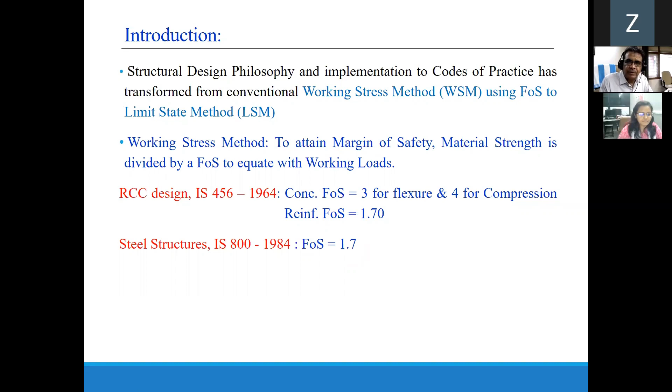The limit state method of design for RCC structure was implemented in 1978, and this method was adopted using a partial safety factor approach. So in place of having only one factor of safety, where material strength is divided by a factor of safety, two partial safety factors are used.

These partial safety factors are for the loads as well as for the materials. As seen in the table, the partial safety factor for the load is a multiplier - that means the working loads or characteristic loads are multiplied by these factors, 1.5 and 1.5, for the dead load and imposed load combination. And if the earthquake load combination along with dead and imposed load is there, the partial safety factor is 1.2, 1.2, 1.2. Two different limit states are also defined: one is the limit state of collapse and another is the limit state of serviceability.

So these are the partial safety factors for the loads, and there are also partial safety factors for the materials. The partial safety factor for loads is a multiplier, whereas the partial safety factor for materials is a strength reduction factor. For concrete, the partial safety factor is 1.5, and for steel reinforcement, it is 1.15. Here, for concrete, a conversion factor from cylindrical strength to cube strength of 1.5 is also used, so it becomes 2.25 for concrete.

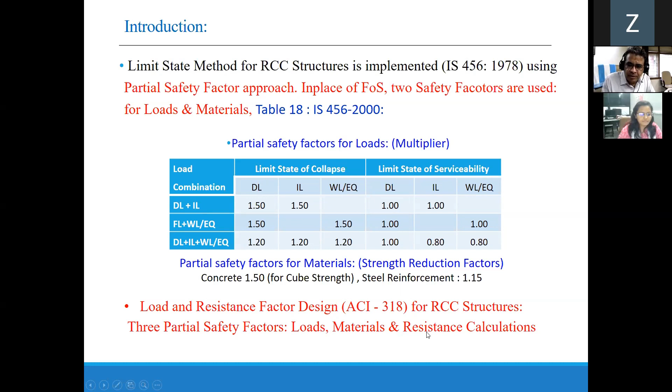So here we are using two partial safety factors in our IS 456, whereas for the design of RCC structures, ACI 318 is using load and resistance factor design - that means there are three partial safety factors. One partial safety factor is for loads, another is for materials, and the third partial safety factor is for resistance calculations or preference of the resistance.

Let us discuss the various requirements for a design - what are the design criteria for designing a safe building, a safe structure? So the first criteria is the stability criteria: the structure should remain stable. Stability is referred to with the global supporting system - it should not overturn, it should not slide physically.

If there is a simply supported overhanging beam, and the load on the overhang is very large, it will overturn. So there is a convention: whenever there is a simply supported beam with an overhang, the support portion should be 1.5 times the overhang portion, to ensure a safety factor of 1.5. So one of the design criteria is the stability check - irrespective of the material, irrespective of method of design, it has to have a factor of safety of minimum 1.5 for overturning and sliding. This is mentioned in IS 456.

Another criteria is safety. Safety is assured with reference to the collapse state. Collapse occurs due to failure of a material. When maximum stress in a material is more than the strength of the material, the state of collapse occurs.

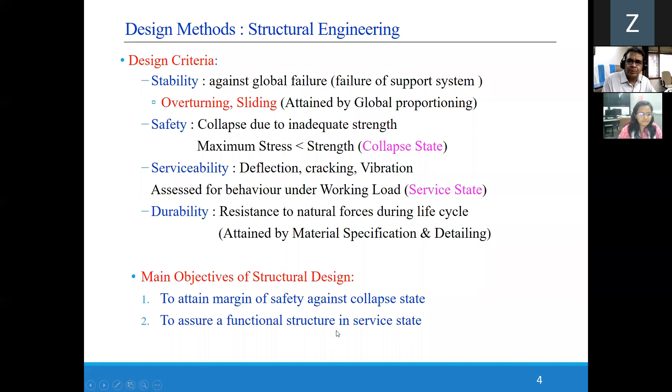So if we see the main objective of the design, as a structural engineer, primarily we take care of two states. Stability is taken care of overall - global care is taken. So mainly detailed design is carried out for two criteria: one is the limit state of collapse, in which we have to attain a margin of safety against the collapse state, and another is the limit state of serviceability, in which we want to assure a functional structure in the service state.

Now we will discuss various design methods in detail. One by one, we'll see what are the design methods, what are the limitations, what are the advantages, and how it works.

So basically, if we look at structural engineering, it is composed of structural analysis as well as structural design. The types of problems handled in structural engineering are the frame structure - that means linear structures. A frame is composed of beams and columns, a composition of a number of beams and columns, and you are designing it in a single plane, or it may be a three-dimensional frame. But these elements are linear elements. So in a frame structure, it will be a two-dimensional, three-dimensional, or one-dimensional structure, but all the elements are linear elements.

Whereas another type of structure is considered to be the planar structure. In the planar structure, the components are slabs, shear walls, folded plates, shells, where you have to carry out the analysis in two dimensions. Here these slabs are considered to be plate elements subjected to transverse load, whereas the shear walls are considered to be plates subjected to in-plane forces. Then there are folded plates, shells, etc. All these are planar structures, structures in two dimensions, for which two-dimensional analysis will be required.

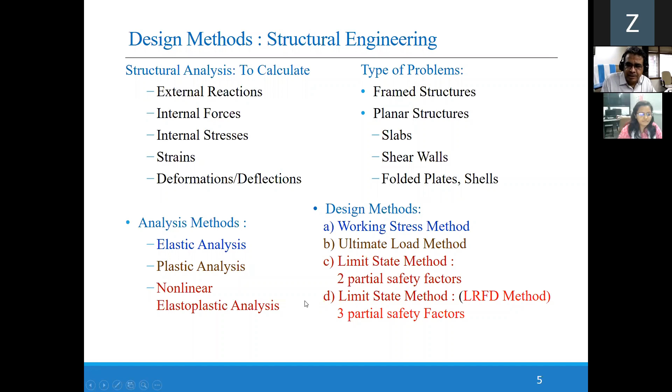So for the limit state method, the actual method of analysis has to be a non-linear method, which is elastoplastic analysis. And let us see what difference it makes.

I'm taking a very simple problem: a two-span continuous beam. When we carry out the moment distribution analysis, the bending moment calculation after moment distribution gives support moment at B equal to minus 144. The span moment for the end span is 115, and the span moment for the middle span is 36 kilonewton meters. The problem is simple and can be done easily with moment distribution.

But if I go to plastic analysis, what is the requirement? It has to form one hinge at the midspan of AB and one hinge at support B. After formation of these two hinges, the bending moment will be the same at the midspan as well as at the support. So at the midspan, the bending moment increases from 115 to 123, and at the support, the moment reduces from 144 to 123.

So if you are doing the working stress method of design, elastic analysis values are required. Now in the plastic state of design, for the end span, the bending moment is 123 minus 123. And if you are doing plastic analysis for the second span, the bending moment here is 90.

So you can visualize that, all of us are using limit state method of design, and we are doing the analysis with the elastic method of analysis. Whether you are using any software, ETABS or STAAD or anything, it gives you the design in the elastic state only. For the elastic state, the bending moment equals 36. For plastic state, the bending moment equals 90. For an intermediate state, it can be somewhere between 36 and 90. So whenever I'm designing for this particular midspan moment, I should provide a capacity more than 36 and less than 90. There is a variation in the positive bending moment in the midspan due to choice of the analysis method. When you are doing ultimate load method of design, both these two can be 90-90.

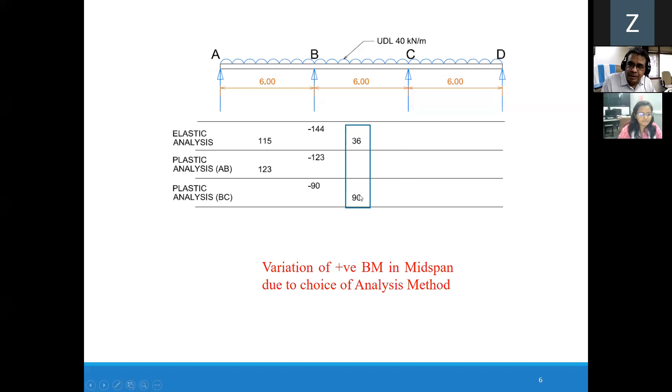So before we go into the design methods, we understand the design steps. For the structural system, we first define the structural system with base fixed or hinge. We select the material, meaning we select the strength and deformation parameters - what is the grade of concrete, what is the Young's modulus. All those parameters are selected. Then we proportion the members.

After proportioning the member, we find out the loads. All types of dead load, imposed load, and earthquake loads are calculated. After that, the analysis is carried out. For all the members, we calculate axial force, shear force, bending moment, and torsion. So once the analysis is done, we carry out the design.

If it is an RCC member, the beam members are primarily subjected to bending moment. So Mu upon BD squared - you have to check for the shear force and provide shear reinforcement. If there is torsion, you have to consider equivalent bending moment and shear force. If there is a column member, you have to design it for axial load and uniaxial or biaxial bending as applicable. Once you have done the analysis, you do the design.

If the members may not satisfy, in that case you have to do the iteration. After iteration, you complete the design and carry out the design detailing process. This is the design process, design steps which are involved in the design of a structure.

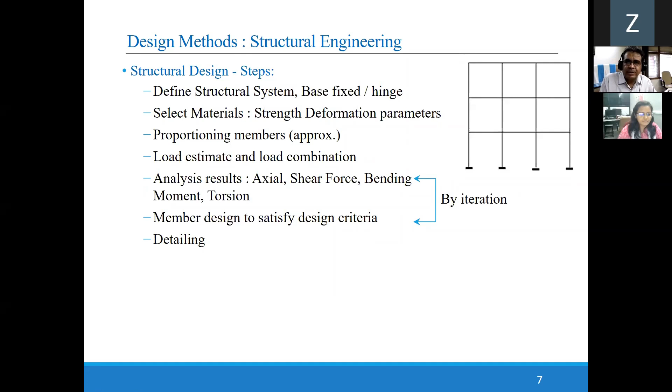So now I'll try to explain what different methods of design are. I'm taking a very simple problem - the sitting of the students is done on benches. This is a bench on which the students are expected to sit. This is a four-seater bench where the width of the bench is equal to 50 centimeters.

These benches are normally manufactured using wood. So I'm taking the stress level as stress of wood equal to 150 kg per centimeter square. This is an illustrative problem to convey the concept of design.

So we are having 4 persons, each of 75 kilograms, sitting on the bench. Approximately, if I consider the total weight, it becomes 300 kilograms. Now, this 300 kilogram, instead of considering it as a point load, I am idealizing it as a UDL. So total 300 kg load, if idealized as a UDL, becomes 150 kg per meter.

And then the bending moment that is induced is equal to WL squared by 8. So 150 into 2 squared by 8, the bending moment induced is 75 kg meter, and maximum shear force at the support is 150 kg.

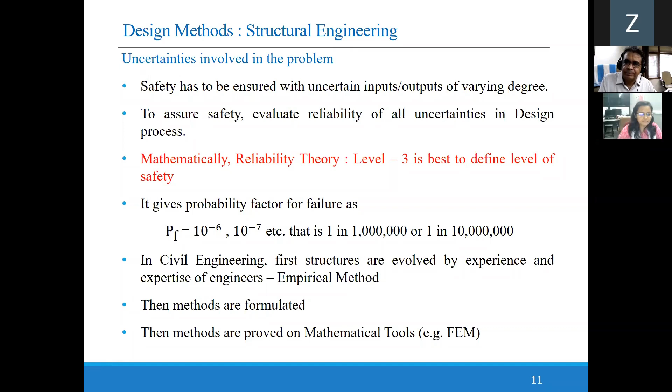The same is applicable to the LRFD method. We say that the LRFD method should have level 3, but that's not possible, so we'll have to satisfy ourselves with something less than that.

Now see the design methods. We have seen that there are three uncertainties. One uncertainty is with reference to the loading, with reference to the material, and with reference to the resistance calculation.

To cater to this need, the earliest method of design was the working stress method. What we do is apply a factor of safety. This factor of safety generally used for concrete, wood, and such materials is 3. For steel, the factor of safety used is 1.7.

In our problem, with the maximum bending moment of 75 kg, I was considering the stress level to be 150 kg per centimeter squared. So if I provide 2.45 centimeter thickness of this section, with this load it cannot handle any uncertainties. Anything slightly more than 75 kg, or material slightly weaker than this 150 kg per centimeter squared, will fail.

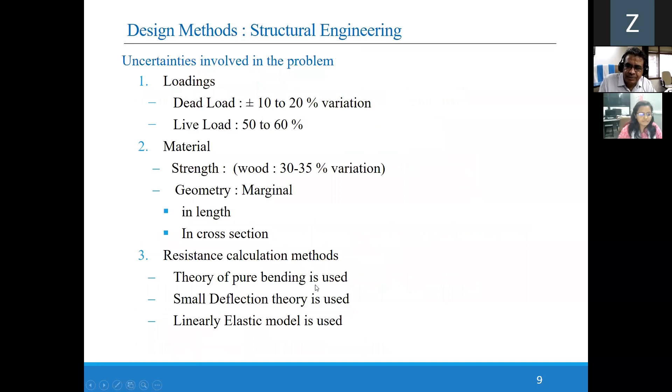So to allow for uncertainties, I am putting a margin of safety with reference to material strength. Material strength is 150, so instead of 150 in this equation, Z equals 75 into 100 by 150, I should put a margin of safety of 3. That means my sigma allowable will be used instead of sigma yield point.

Yield point is 150, factor of safety is 3, so allowable is 50. My Z required is 150 centimeters cubed, and BD squared upon 6 is equal to 150. Therefore D is equal to 4.24 centimeters. So by the working stress method of design, I provide the thickness of the wood in the benches to be 4.24, say 4.2, 4.3, or you may go for 4.5 centimeters.

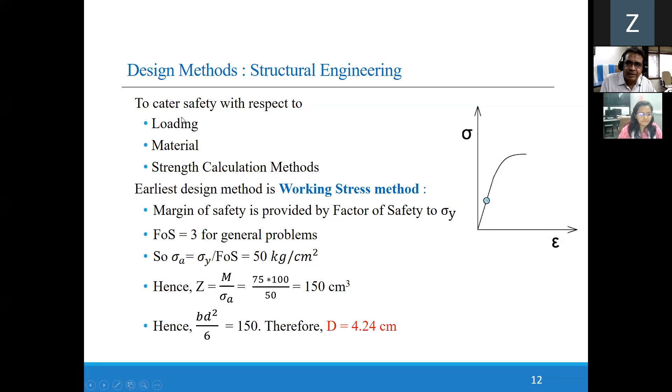So approximately 1.75 inches thickness is provided for the benches, and it will be safe. It will resist all the uncertainties in loading, uncertainty of material, and uncertainty of strength calculation. So this is the working stress method.

Ultimate load method: what we do is, right now I'm having the weight of the person as 75 kg. What is normally done is I increase the weight of the person by some factor. Whatever loads are there, I'm not decreasing the stress level, I am increasing the load level. So all loads are increased by 1.7 times.

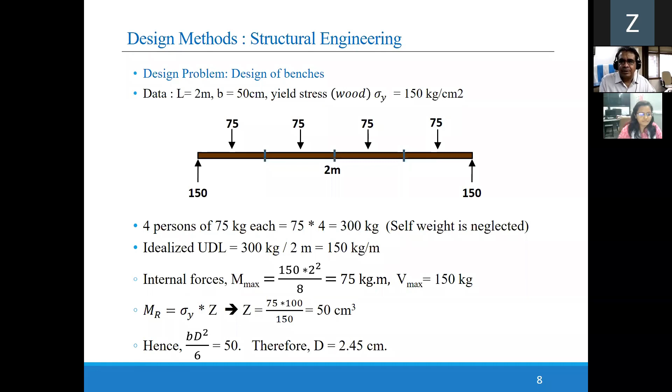That means approximately 120 kg. If all the people are 120 kg, that will be the collapse state, so 120 kg people will not be possible. That 120 kg has to take care of the material, the loading, and the approximation in the resistance calculation. So this next method of design was the load factor method.

Now this is a load factor method of design. So what is done? The loads are increased by a factor, that load factor is 1.7 to 2. So if this is wood, we are increasing the load factor equal to 2. So Mu is equal to, instead of 75, it becomes 150. So Z becomes 150 into 100, Mu upon sigma y. So that becomes 100 centimeter cube. So our thickness is how much? D is equal to 3.46 centimeter.

So if we are doing it by the ultimate load method, I am getting a thickness equal to 3.5 centimeter. Working load, it was 4.24 centimeter. Here I am having a concept in my mind that when the load becomes 2 times, that means when the weight of the person is 150 kilogram per person. So that means I have an idea what can be the overload it can take. So now the safety margin is known to me in terms of extra loading.

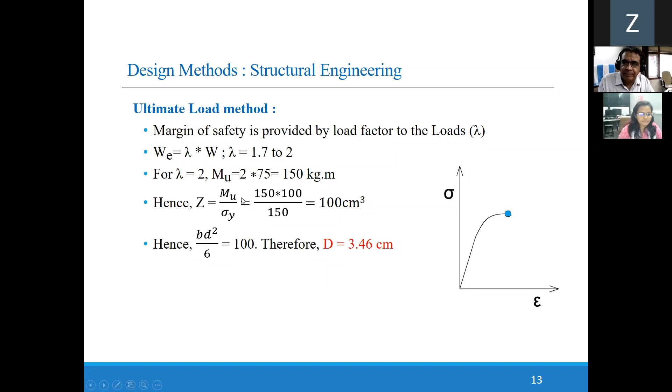So if we now compare these two methods, here margin of safety is with reference to the material only. In the ultimate load method, it is with reference to the loads only. Here, when you are using working stress method, there are loads with different uncertainties. I say no, dead load uncertainties are very less. What is the variation in the cross section of the beam, cross section of the benches? Hardly some small variation can be there, 5-10% variation. And variation in the live load is more. So I should not keep the same margin of safety for dead load and same margin for live load. But because there is only one factor of safety, we are having same margin for dead load and live load both.

So in ultimate load method, you are having same margin but different load factor. So for dead load, you can have a load factor 1.3. And for an imposed load or live load, you can have a larger factor of safety because this is more uncertain. In working stress method, we have margin of safety with reference to the material strength, and it is not cognizable. That means when it is overloaded, you will not be knowing how much overload it can sustain. Whereas in the case of ultimate load method, it gives us a physical sense. You said that if you are having a load factor of 1.5, that means at least up to 1.5 part, it is going to sustain the load. So when it becomes 1.1, 1.2, 1.3, we are assured that however it is overloaded, it will not collapse.

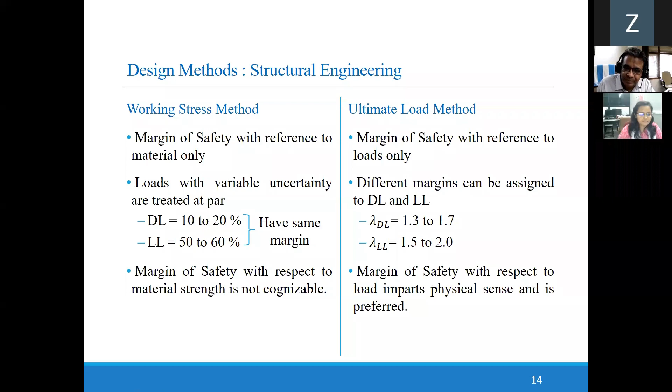Another important point in both the design methods is, as I said, in working stress method, we are having a factor of safety against the maximum stress value. So when your maximum stress value is divided by 3, at which level we remain? We remain in a very lower stress value. And lower stress value means it is almost a linear part. So in the analysis, we can neglect the non-linearity, both in the analysis as well as in the design strength calculations.

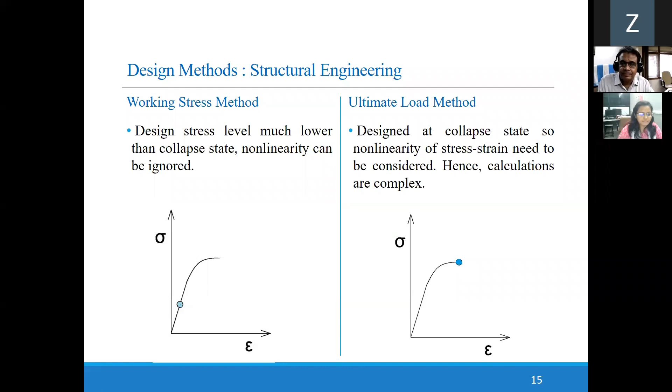In the ultimate load method, at which state we are designing? Ultimate load method means you are increasing the load to collapse state. So what is the design state? The state of design for the ultimate load method is the peak value. And for that value, you have to take into account the non-linear behavior and the method of analysis. That elastic analysis will not work here. You have to go for a plastic analysis. So for a non-linear method, for ultimate load method, we have to go for plastic analysis. Design stress level is much lower than the collapse state. Non-linearity is ignored here. For ultimate load method, non-linearity is to be taken into account, and calculation becomes very complex.

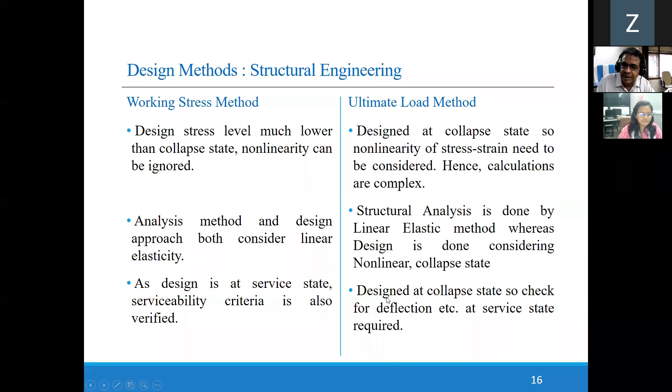Here, when we are doing working stress method, our analysis method and the design method both are linear. Whereas in ultimate load method, normally the analysis is carried out by linear elastic method and design is taken as a collapse state as non-linear. So there is an anomaly in the ultimate load method. In the working stress method, the design is completely done at the service state because the factor of safety is 3 to the maximum strength value, so serviceability criteria is also verified. Here, it is at the collapse state. So if you are doing the ultimate load method of design, you have to design it for the limit state of serviceability as well, I mean the service state also. So collapse state it is designed, but check for the serviceability, we have to make it.

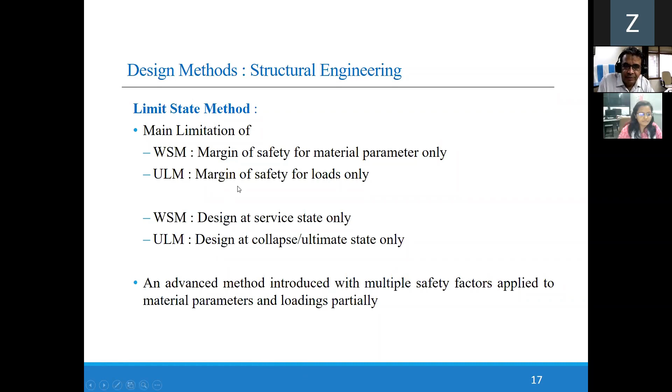So now to overcome the limitation of both these methods, the limit state method is evolved. Limit state method is evolved to take care for the margin of safety for materials and loads together. So working stress method only has margin of safety for materials, ultimate load method has margin of safety for loads. Working stress method is at the service state only, and ultimate load method is for the collapse state only. So instead of having these, multiple partial safety factors are recommended to be used.

So the limit state method means the structure will be designed for 2 states. One is the limit state of collapse and another is the limit state of serviceability. Limit state of collapse means you have an overloading factor to be multiplied, assuming that the structure will reach the collapse state. So that is a non-linear behavior to be accounted for in the limit state of collapse.

For the limit state of serviceability, we have to take care for the linear behavior only. So we have to take care for margin of safety with reference to two things: one margin of safety with reference to the understrength, and one margin of safety with reference to the overload. This has to be taken care of in the ultimate limit state method. So this is the ultimate limit state.

And to assess the deflection and cracking, what we call is SLS, that is serviceability limit state. So ultimate limit state and serviceability limit state are the two limit states that will be verified for the limit state method design. And right now we are going into much more detail about the limit state of collapse.

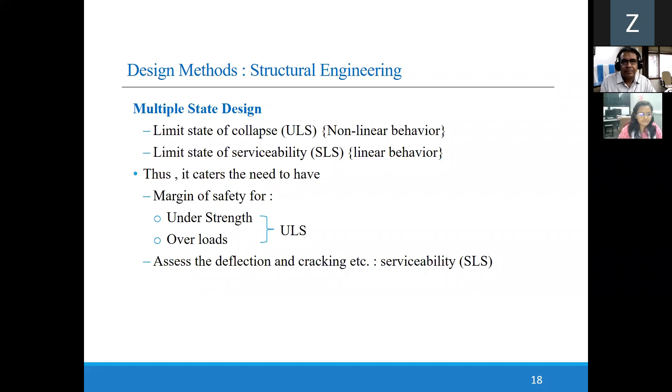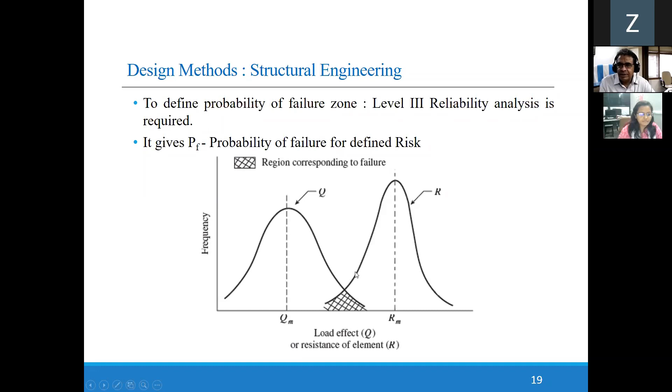This is required for those who are finding out how much the value of partial safety factors should be. So level 3 reliability, level 2 reliability, who studies this? It is not to be studied by the engineer who is implementing LRFD. It has to be studied by the engineers who are developing LRFD. There are people at Purdue University, like Salgado. There are a number of people involved in the development of EC7, Eurocode 7. They are all involved primarily in the reliability methods. So those who are involved in LRFD development have to go into the details of reliability.

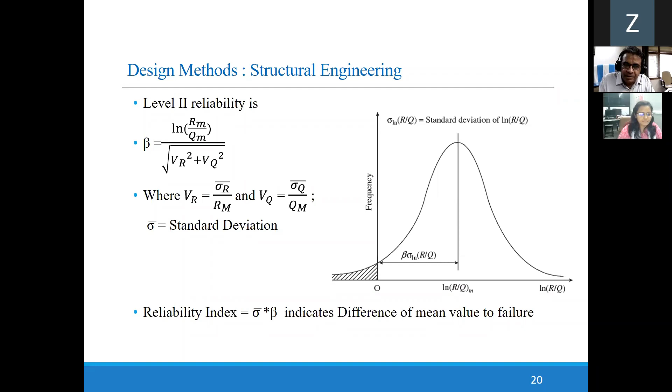So you see that the beta factor, which is calculated, gives the probability of failure. So if it is calculated, 1 in 1 million and 1 in 10 million - what is the beta value? Beta value, probability of failure comes to 5%.

Just one minute, I have to excuse myself.

Okay, so that was a phone call from my sir.

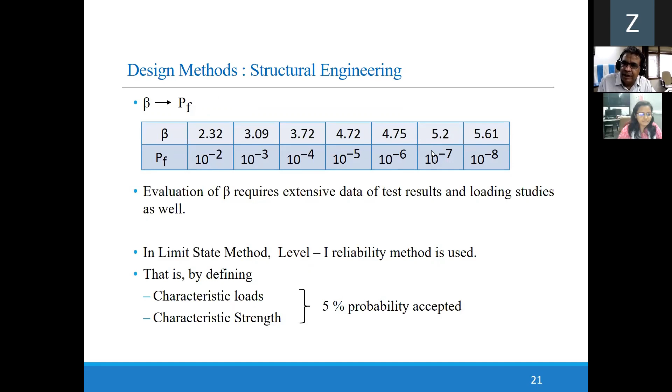So initially by level 3 and level 2, corresponding to 10 raised to 1 in a million or 1 in 10 million, what is the probability of failure? 5%. So that is derived, and after that, 5% is considered as the basic value.

So now we see our limit state method of design - it is highly simplified now. What you have to do is apply two partial safety factors. So with characteristic strength, the definition of characteristic strength is taken as the 5% value. Probability of failure as 5%.

So with 5% probability of failure, the partial safety factors for the loads are designed: dead load plus imposed load 1.5; dead load, imposed load, and wind load 1.2, 1.2; dead load and wind load 1.5, 1.5 for the ultimate limit state. So the partial safety factor for the loads, gamma, is again a multiplier. Now this partial safety factor for the load - we discussed earlier that in the working stress method, both the loads are considered at par, dead load and imposed load.

However, our IS code is also considering dead load as having the same variation of 1.5, and imposed load also having the same uncertainty level of 1.5. Using the same partial safety factor for both loads means we are accepting that the uncertainty level of both types of loading is identical.

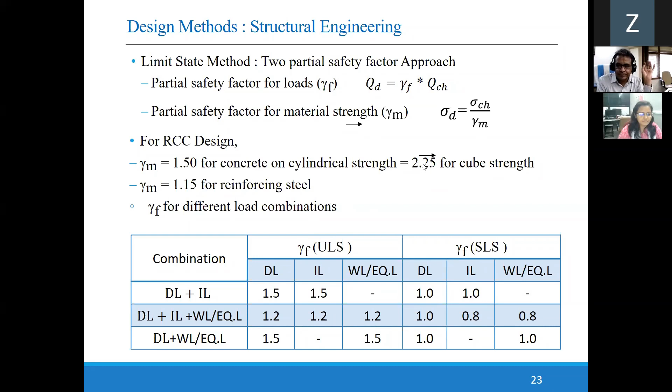So nominal resistance is proportional to the strength. Now, if you see the mu upon BD squared equation, that is directly proportional to FCK and Fy. So whatever resistance is calculated, if divided by the partial safety factor of material, it has to be equated to the loading, that is characteristic load multiplied by the partial safety factor for load. So what we have to equate is resistance upon material partial safety factor equal to loading multiplied by the overloading factor, gamma F.

So nominal resistance upon the characteristic load is equal to gamma M into gamma F. This is approximately what was resistance in the working stress method, and this is what was loading in the working stress method. So resistance upon loading is equal to factor of safety. Gamma M into gamma F gives an idea about the factor of safety.

If we consider a crude comparison, the partial safety factor will be different for different materials and loading. But if we consider the partial factor of safety for concrete: nominal resistance upon design service load, Rn upon QCH, equals gamma M into gamma F. Gamma M is equal to 2.25 for material with reference to cube strength.

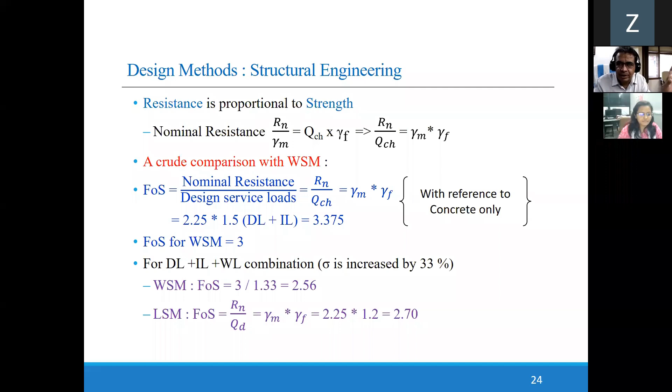When we go to the limit state method of design, what advantage do we have? The additional advantage is by going up to the partial safety factor of 1.5 for the load, we are using the non-linearity of the stress-strain curve. With this non-linearity, we get higher concrete strength, and with higher concrete strength, we get a higher value of resistance.

Now, ACI 318 format is a 3 partial safety factor format. There is a partial safety factor for the loads, a partial safety factor for the materials, and a partial safety factor for the strength.

For the strength, it takes care of 2 criteria. One is simplification of the resistance calculation, and second is preferential failure. So flexural failure is preferred, having a partial safety factor of 0.9 for resistance, while axial compression has a smaller partial safety factor of 0.7. So for columns, they use an additional margin of safety of 0.7.

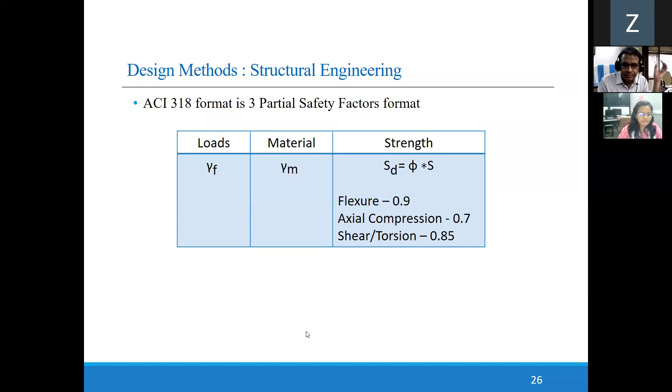This much time it took me to explain the basis of the design, because without that we cannot understand what is to be done in geotechnical engineering. What are the problems? Now the problems in structural engineering are not as much as compared to geotechnical engineering.

Even then you have to simplify, you have to come to level 1 reliability. Structural engineering is not doing the reliability method level 3 or level 2. It has to satisfy with reliability level 1.

So now whatever partial safety factor we have for the structures, we want to find out similar partial safety factors and which load combination should be used — which combination of partial safety factors to be used in different cases. This we will see in light of the Eurocode 7 mainly.

Because IRC is not yet implemented. IRC 78 we have started, but it is not implemented. So IS 6403 is used, the way we had IS 456 1964 for RCC design in working stress method.

Still we have the prevailing IS 6403 for bearing capacity calculation. It gives us the bearing capacity factors. And for getting an allowable bearing pressure, a factor of safety of 2.5 is recommended.

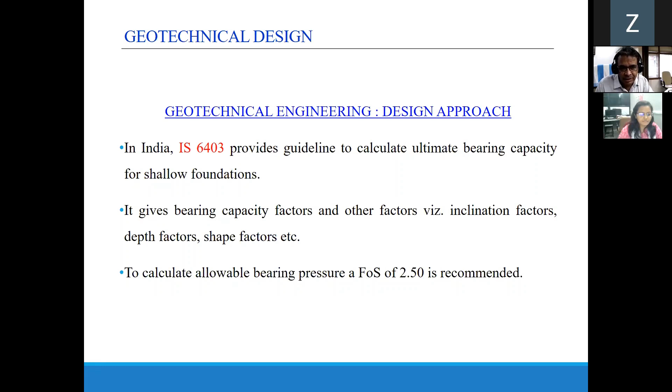So from 1978 onwards, all RCC structures are transformed to the limit state method of design. From 2010 in India, all steel structures are also transformed to limit state method of design, but still the geotechnical design, because ultimately the loads transferred to the foundation are the same as obtained in the structural design, so the method of design should be compatible with structures as well as geotechnical.

Therefore, people have made efforts in Europe for LRFD method of design to be implemented for geotechnical as well as for structures together, and Euro Code 7 is the exercise carried out for this. An exercise in great detail has been carried out, and it is implemented after 1995. It is in practice, but you will see that there are so many anomalies still there in the LRFD method.

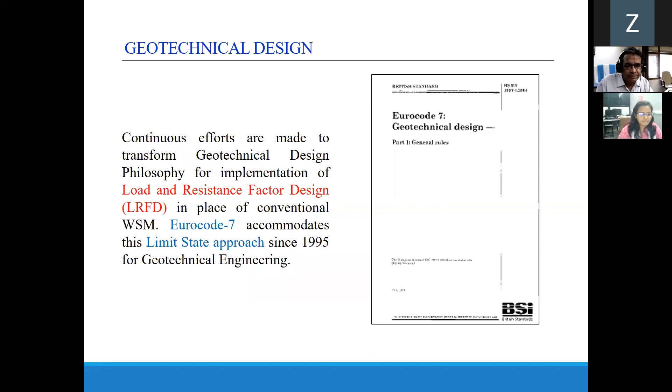IRC is also in the process of evolving a guideline based on EC7, applicable for bridges, not for buildings still. So for buildings, our IS code is not doing anything for this. For bridges, it takes care of the shallow foundation. If somebody wants to use the LRFD method for the shallow foundation, whether it's for bridges or buildings, it doesn't make any difference. Only thing is appropriate load combination should be used.

So IRC 78/2020, the first draft code, was given in 2017. After 3 years, it is again updated as a draft code and put into practice. Let us see when it comes into effect.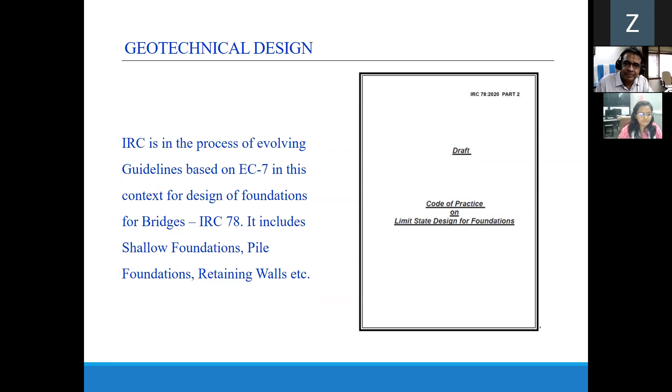Now, for design of RCC beam, as I said, the partial safety factor for the material will be applied here in FY and in FCK. So with the application of partial safety factor, the resistance calculation is directly a function of material properties. We have to see the difference between a structural engineering problem, RCC design or steel design, and geotechnical design. In RCC design, whatever material properties we consider, FCK and FY, they are directly used in the resistance calculation. So moment of resistance is calculated based on these properties directly, FY and FCK.

Whereas in the design of shallow foundation, how is ultimate bearing capacity calculated? It is calculated using the equation adopted by IS 6403 -- basic Terzaghi's equation, then Vesic's equation, bearing capacity corrections and everything. The IS code has incorporated this equation. Now what are the material properties for soil?

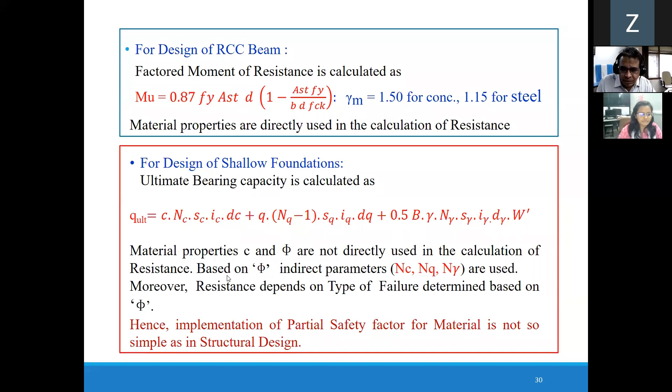So the most important aspect of geotechnical engineering application is that soil properties are not directly used for the resistance calculation, but these indirect parameters are used instead. And that is the major limitation of implementing LRFD into geotechnical engineering. So let us see the quantitative approach also.

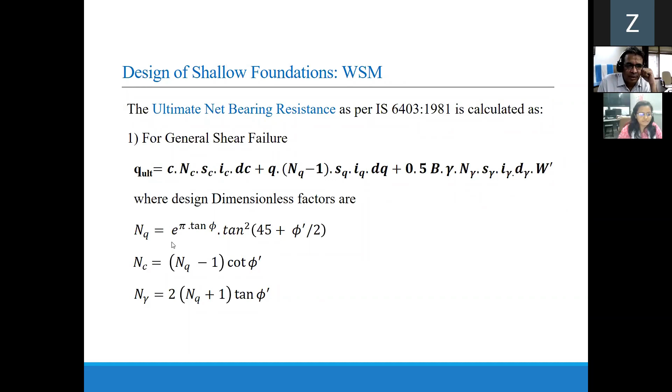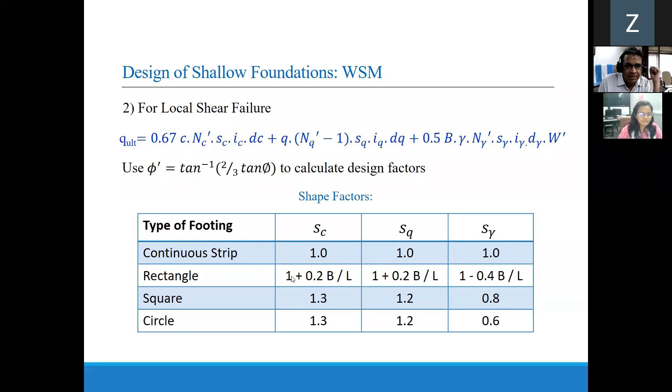So the ultimate net bearing resistance as per IS 6403 is given by this equation, as per IS 6403 guidelines. Here you will be able to calculate NQ, NC, and N gamma based on the type of the footing. You can have the shape factor for various cases, that is for SC, SQ, and S gamma, calculated like this. Depth factors and inclination factors are also there. This is all from IS 6403.

As I discussed, the theory is valid only for general shear failure, not for local shear failure. Now, what is the guideline given by the code? The code says relative density equal to 70% or more, void ratio 0.55 or less, general shear failure will occur. If relative density is lesser than 30%, void ratio more than 0.75, then local shear failure will occur. Otherwise, in between, it's a mixed shear failure. This is the guideline available in the code.

Now, relative density and void ratio are not measurable parameters from the undisturbed sample. We have a cohesionless soil - for cohesionless soil, how to get the sample? We don't have a sample; undisturbed sample cannot be obtained. If undisturbed sample cannot be obtained, why have a guideline in terms of void ratio? You don't have void ratio. And we don't have relative density either, because for relative density you need a large sample to calculate gamma D maximum, gamma D minimum, and then you should have undisturbed sample for the calculation of relative density, gamma actual. So both these parameters are not available in actual practice.

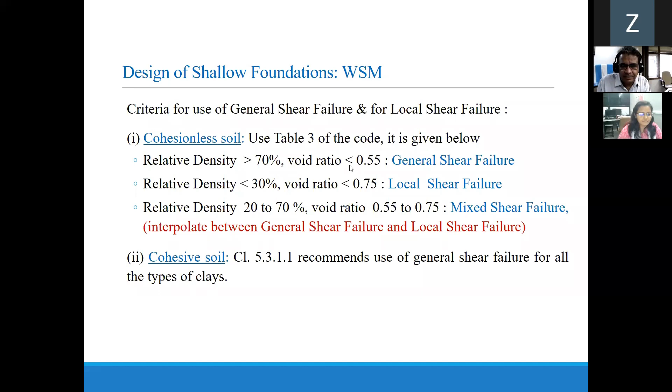So how does the actual practice go? However, the relative density and the void ratio are the parameters used for the definition of the general and local shear failure. We are using phi value instead. If undisturbed samples are available, you can have the laboratory test value directly - phi greater than or equal to 36, phi less than or equal to 28 for local shear failure. This is for general shear, and here is for the mixed shear failure.

So normally these two parameters are not used. Either N value is considered, or based on N value, we get the value of phi. So in most of the cases, our phi is based on SPT value. SPT test is also a very crude test, as I said, it is a very crude test.

See, in geotechnical engineering, it is said that you measure it with a micrometer, then mark it with a chalk, and cut it with an axe. So what kind of accuracy is achieved in this process? Similar accuracy will be expected in the geotechnical engineering processes. So everywhere you will have to arrive at your own judgment, experience, and expertise. More or less, you have to have a very good background about the empirical formulation, which is going to be of great use in geotechnical engineering.

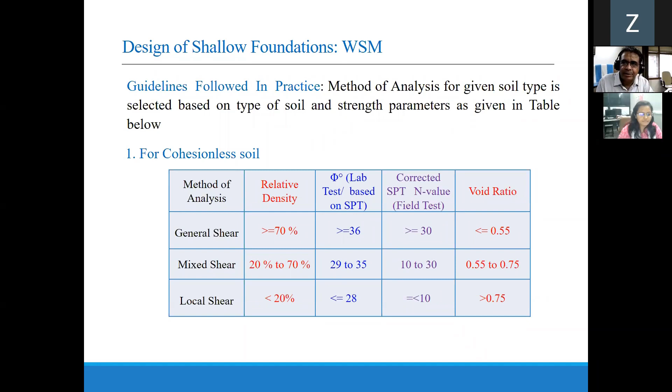So let us see the design of a shallow foundation for the mixed shear failure case of phi equal to 32 degrees. So it is interpolated - the parameters are to be interpolated for phi equal to 32 degrees to be a mixed shear case. So you find out the local shear parameter, you find out the general shear parameter, and then you interpolate to get the mixed shear failure parameters. All the geotechnical people who have done bearing capacity calculations must be knowing this.

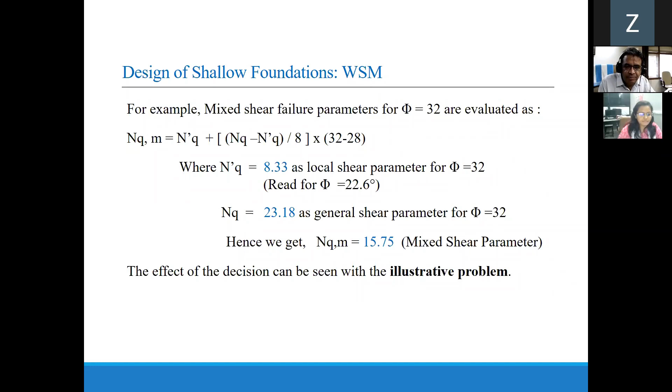So we get mixed shear value of Nq 15.75, with phi equal to 32 degree for this footing. If general shear parameters are used, the ultimate bearing capacity is 1107 kilonewton per meter square. At phi 32 degree, mixed shear failure gives ultimate capacity of 770, and if local shear failure is considered, it comes to 327.

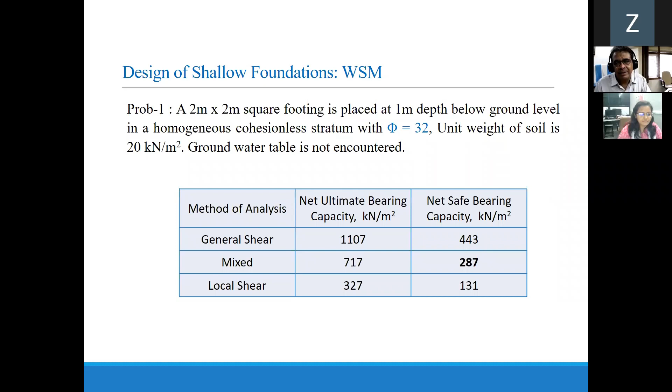So now let us implement limit state method for geotechnical engineering. This is the background that was required for the working stress method. Now we transform to the limit state method for geotechnical engineering. There are two limit states: ultimate state and service state. For shallow foundations, we have to take care of the ultimate state, and service state means settlement.

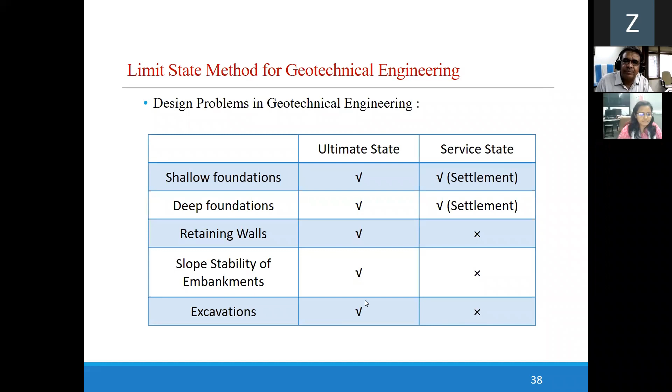Deep foundations also have ultimate state and service state. For retaining walls, we do not go for service state. For slope stability, we go for ultimate state only. For excavation, we normally go for ultimate state, not necessarily all the time, because if there are adjoining structures, or supposed to be adjoining structures, you have to go for the service state also for excavations.

Now, evolution of various design methods. In geotechnical engineering, it is mainly based on experiment, experience, and learning from failure. So many retaining walls have failed, so many braced excavations have failed, and after that Terzaghi has given that braced excavations cannot be designed with the active state of earth pressure. So he has given the trapezoidal diagram for the distribution of earth pressure for braced excavation.

Similarly, for all the cases we have some presumptive values of bearing capacity. There are empirical formulas available; for settlement calculation, we still rely on N value versus settlement by Teng's equation or Teng's chart. So geotechnical engineering is more on the empirical side than the mathematical side, because we don't have an undisturbed sample. So you have SPT N versus phi relationship, N versus relative density, N versus settlement relation, N versus SBC - all those empirical relations are in use.

So that has to be considered while we are developing the LRFD method. And behavior for phi equal to 28 and phi equal to 36 - it is not the variation linear with degrees. The difference is significant. When it is 35 to 36, it is a significant change. 28 to 29, it is a significant change.

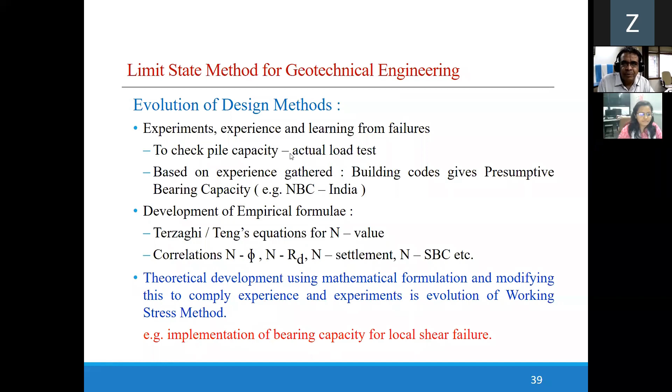So all these methods require an empirical way of working. Theoretical development is only for general shear failure. What about local shear failure for soft soil, weak soil? You don't have the direct theoretical development. So for all this we will have to rely much; we have to bank upon the empirical methods.

So these are the geotechnical design approaches given by Eurocode: designed by calculation, designed by prescriptive measures, designed by actual load test, designed by observational methods. Based on the different design approach, it will provide you different partial safety factors. If designed by calculations, then your partial safety factors are only on the lower side. If it is based on prescriptive methods, your partial safety factor will be higher. If it is based on actual load test, then partial safety factor will be on the lower side.

Similarly, it defines what should be the factor of safety or margin of safety to be considered, depending upon the type of structure. Here 3 categories are defined: small and simple structures, where negligible risks are there, like temporary structures. The conventional structure means no exceptional risk - that means your foundation soil is also good, foundation has predictable behavior, and the structure also has predictable behavior, so all conventional structures come into the second category. The third category is special structures or difficult structures - special structure means monumental structures, suppose Sardar Patel statue - they cannot be designed for the same allowable settlement.

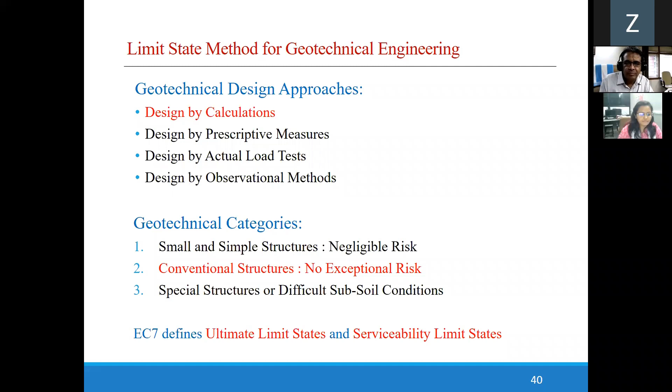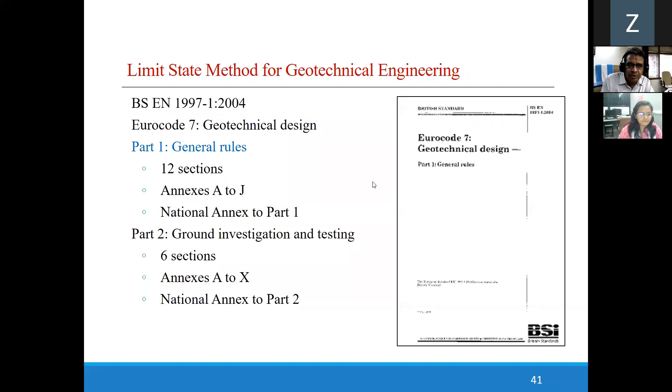The Eurocode also defines ultimate limit state and serviceability limit states. This is Eurocode 1997 part 1, now implemented as Eurocode 7 2004. These are the general rules for the content of Eurocode 7, and these are the limit states which are given.

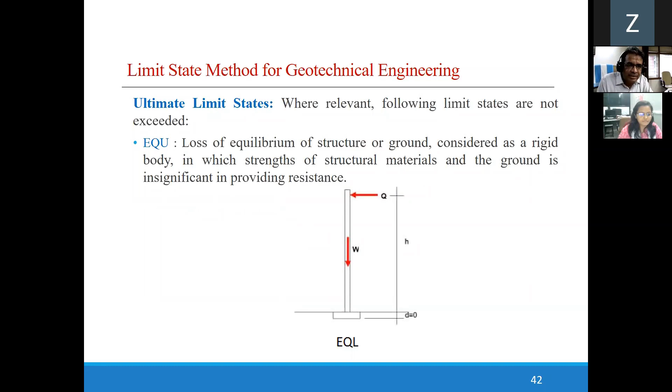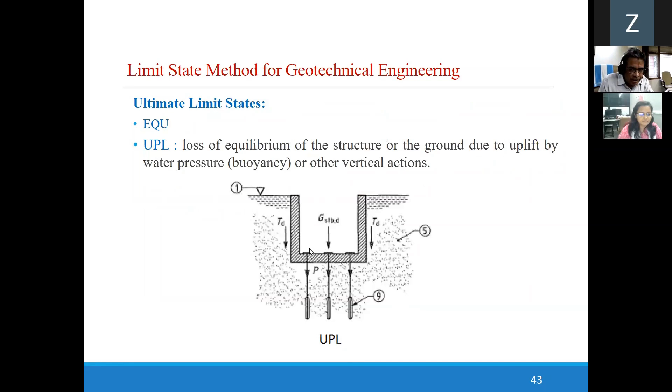Equilibrium limit state means loss of equilibrium - this is stability analysis, due to overturning and all that. UPL is because of the uplift - if this is geotechnical, there will be an uplift of the underground structure. So UPL state.

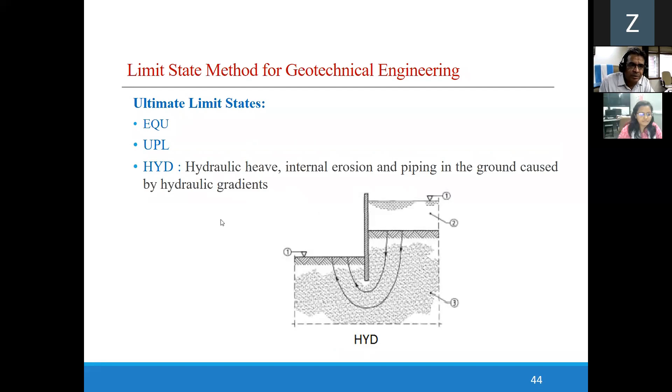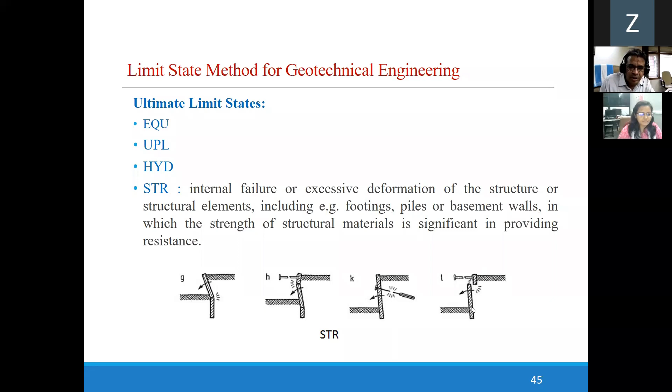Hydraulic heave - there is seepage, so hydraulic heave also has to be considered. The structural part means the component of the structure fails, so this is a structural failure. This is also considered to be a part of Eurocode 7.

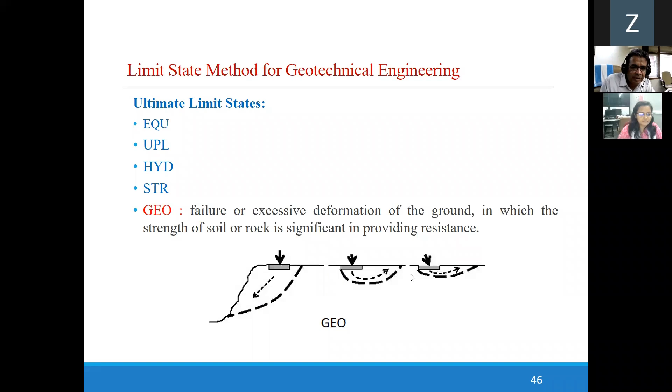So the fundamental limit state requirement is this: design or factored action effects. Action is considered by E, so E design is less than or equal to design resistance. Design action effect should be less than design resistance - resistance has to be obviously more. That is the criteria to be satisfied.

Now, how to find the design effect? Design effect is a function of loads or actions and material strength. Characteristic loads are multiplied by the partial safety factor for loads, and characteristic strengths are divided by the partial safety factor for materials. So the load factor is a multiplier, and the material partial safety factor is in the denominator - it is a reduction factor.

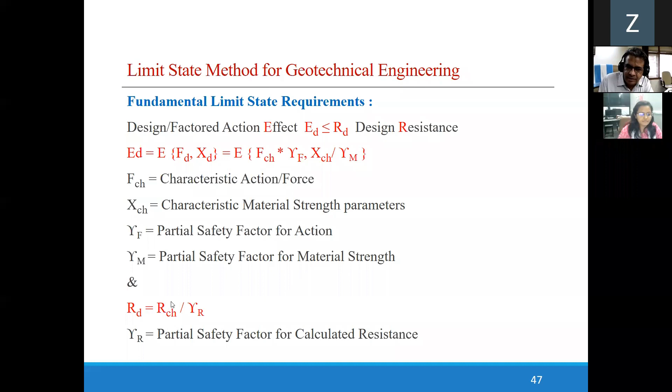The third factor is how to find out design resistance. This design resistance is calculated using characteristic resistance - this is based on, say, a bearing capacity equation. So RCH is resistance calculated from the bearing capacity equation, divided by the partial safety factor for resistance.

So how are the characteristic values to be determined for geotechnical engineering? How do you find out the value of C and the value of phi? It is the most difficult problem, because you don't have much available data.

If you are having a site, you do not get the statistical value. Most of the cases, you have to rely on the designer's expertise and understanding of the ground. Whatever data you have, you don't have many statistical values available because you don't have homogeneous data encountered at most sites. Even if it is a homogeneous strata, the value obtained from testing will be different because you don't get an equally undisturbed sample.

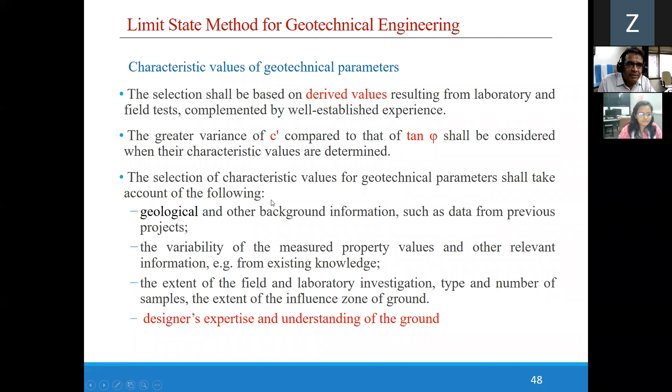So the most important aspect of applying LRFD into geotechnical engineering is defining the characteristic value of the geotechnical parameter. So how is it determined?

You have the field value or laboratory value of the measured parameter from a particular test - say N value from SPT, or N value to phi value, all these measured values. Suppose you are having a direct shear test on a subsample, C and phi values are there. Then by empirical relation you find the derived value. Some other values you can get from the actual load test. So from all this, one tries to conclude the geotechnical parameter value.

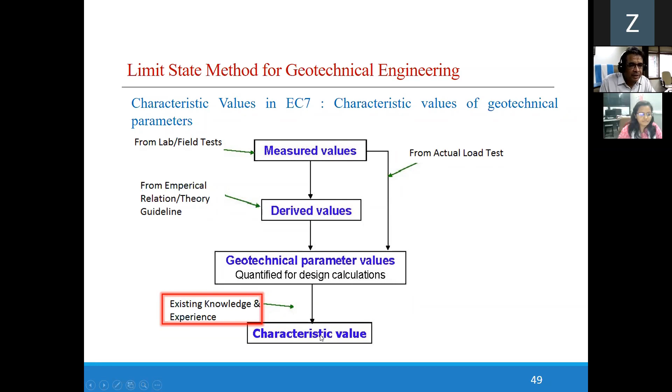After getting the measured value, you have to use your existing knowledge and experience. Many times, we have used our experience to know that the value obtained in the laboratory cannot be correct, so we put those values aside and use some other parameters or empirical values in practice. Then it becomes a characteristic value - meaning it will be moderately conservative.

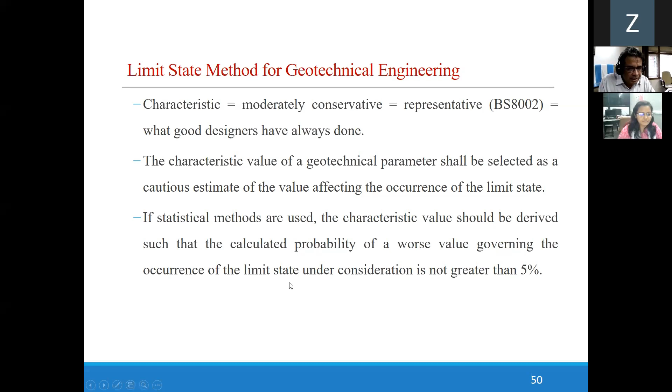So if you have a number of samples available for a site, what will be the criteria? A 5% probability will be there - like concrete, say you are having 32 samples. Out of those 32 samples, if you get the coefficient of variation of everything, whatever is the characteristic strength, it will be identified as the value below which only 5% of the samples have strength lesser than the characteristic value.

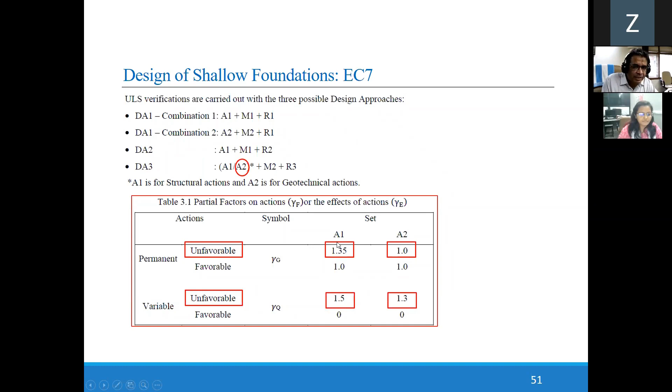So for soil, there are 3 combinations to be considered. What is the partial safety factor for action? 1.35 and 1.5 for dead load - this is for A1 combination. For A2, both values are 1 and 1.3.

For bearing, the partial safety factor for resistance - R1, R2, R3 are there. R1 and R3 are both 1, R2 is equal to 1.4. We are talking about bearing. These are the partial safety factors for resistance.

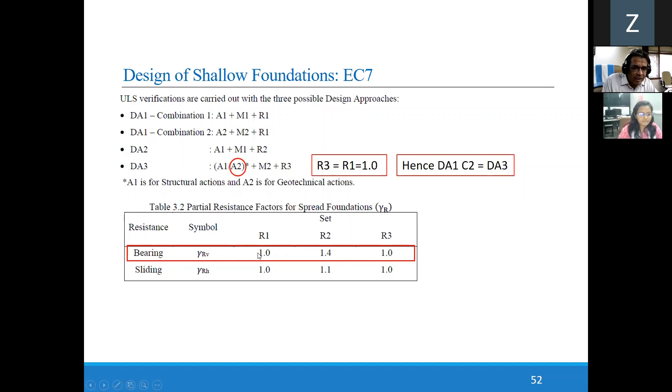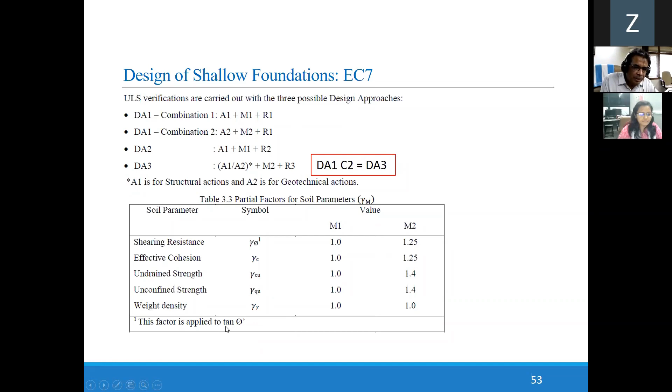Partial safety factor for soil parameters: for M1 and M2, M1 means partial safety factor for material. If you are using load combination 1, your partial safety factor for shearing resistance is 1. If you are using DA1 C2, then M2 combination applies, and M2 you take as 1.25. So that is how all the partial safety factors are used. If you have a value of phi, then tan phi will be divided by 1.25, not phi itself. Instead of phi, the factored value of tan phi is equal to actual tan phi divided by 1.25.

Drained means cohesionless soil, so partial safety factor is 1.0, resistance partial safety factor is 1. Then for DA1 C2, load factor is 1, 1.3, drained factor is 1.25, and resistance is 1. Then for DA2, it's 1.35, 1.5, material is 1, and resistance is 1.4.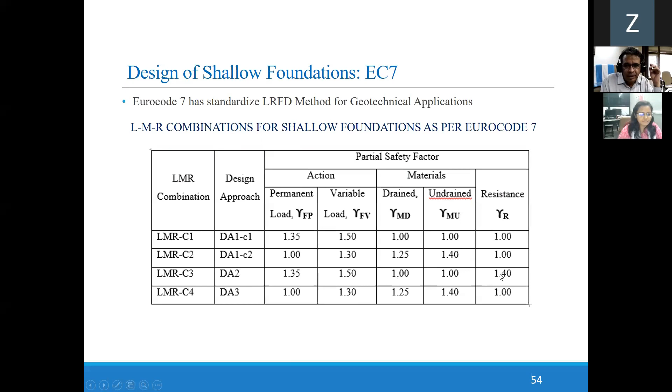After doing all this, what you have to check is that design resistance must be greater than design action - design action should be less than design resistance.

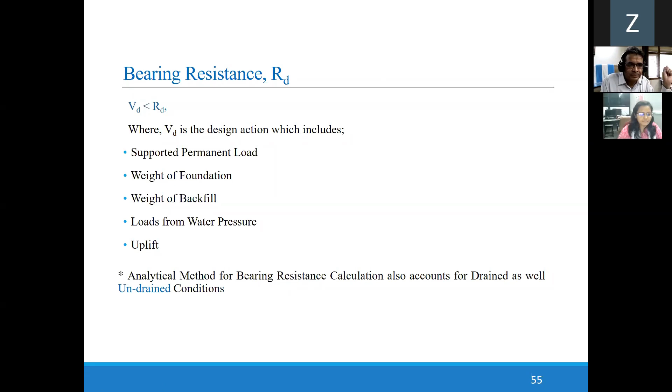A sample problem conforming to Eurocode 7 is done here. So these are the data: length and width is equal to 2 meters, depth is equal to 2 meters, dead load is 2000 and live load is 1000.

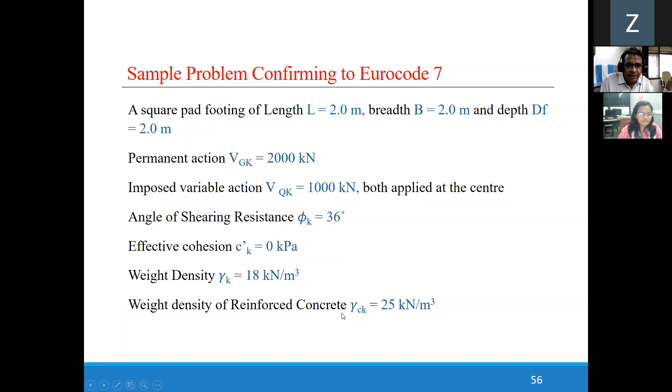So total load is how much? 3000 kilonewton load is there. Phi equal to 36 degrees, gamma equal to 18, reinforced concrete is 25 kilonewton. Partial safety factor A1 and A2 is 1.35 and 1.5 for dead load.

For dead load it is 1.35 and 1.5. Dead load 1.35, so this is DA1 C1. So vertical load becomes how much? Factored vertical load becomes 4200 kilonewton. Actually it is 3000 - 2000 and 1000. When factored with 1.35 dead load, 1.5 imposed load, it becomes 4200.

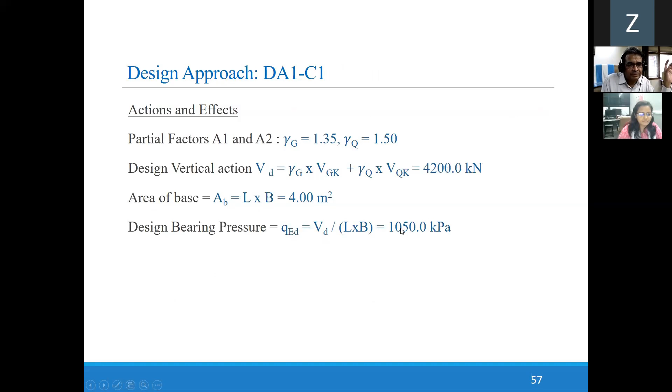Now area of base, how much? 4 meters square. So how much is the design bearing pressure? 1050 kPa.

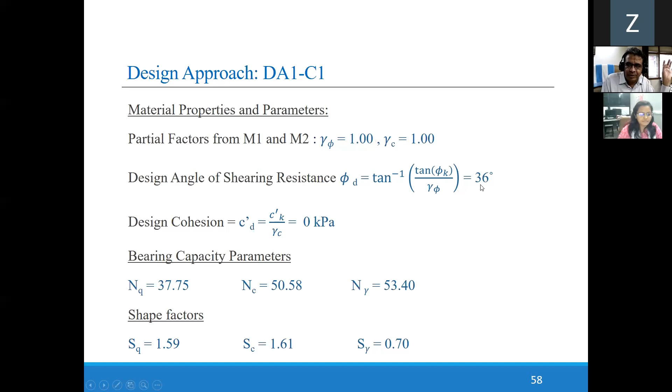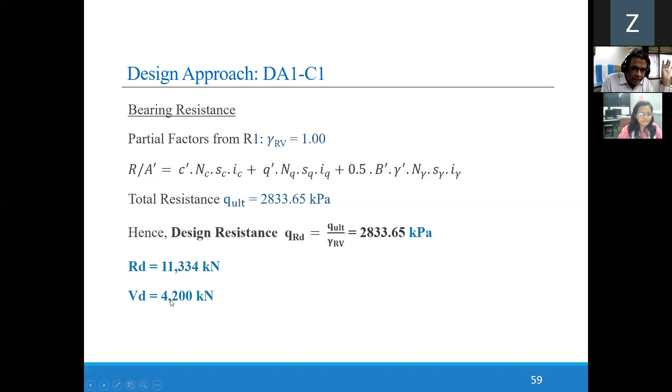Now DA1 C1 calculation: for phi equal to 36 degrees, what partial safety factor do you apply? The partial safety factor is 1, so your factored value is also 36. And what you get is NQ, N gamma, and you put it in the bearing capacity equation. Partial safety factor for R1 is also 1. So what you get for DA1 C1 is the ultimate resistance equal to 2833.65, and this is the design resistance - 2833 multiplied by area, where area is 2 by 2. So you have design action 4200, design resistance 11,000 according to DA1 C1.

Consider DA1 C2 and DA3, both are identical. When we do it, the 36 degree angle becomes how much? Because it's divided by 1.25, the material safety factor is 1.25, so 36 divided by 1.25 becomes 30.16. So your parameters become NQ and gamma 20.62, so bearing resistance is 1271.77. So total resistance is 5,000 kilonewton, and total design action is 4,200.

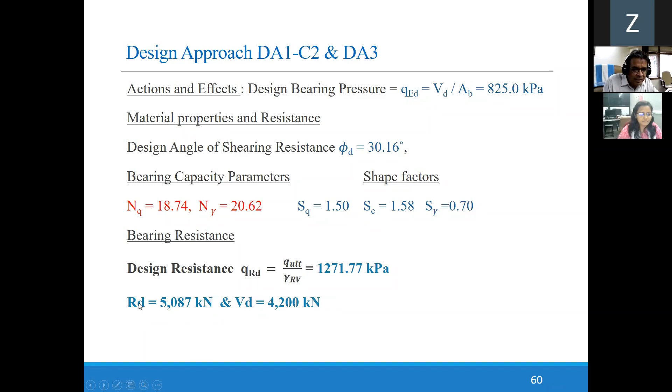Then design approach 2, DA2. Here also you are getting 8,097 and 4,200. That means the governing criteria is this much. For a 2 meter by 2 meter foundation, you take the minimum RD divided by VD value as the design value, where this ratio is minimum, and this ratio should always be greater than 1. So this is satisfied.

Now, to identify the limitation of this method, I am carrying out a parametric study. Okay, I'll take 5 more minutes.

A square footing is put at a depth of 2 meters. Gamma is equal to 18 kilonewton per meter cube. I'm using a dead load of 80 and live load of 40 tons. 3 different problems are considered for angle of internal friction: 28, 30, and 36 degrees.

The width of the square footing will be obtained based on the IS code. So to resist the load of 80 ton and 40 ton, what is the width of footing required for all these cases, 28, 30, and 36? What I will be doing is, I have calculated this width required as per IS code. So if you find resistance upon the action for IS code, how much will it be? It will be very close to 1.

So for the IS code method, I am using this for proportioning. First, footings are proportioned according to the IS code. And then, for whatever width is calculated as per IS code, I am calculating the resistance of the footing as per Euro code.

Now I am considering 2 cases while calculating the Euro code resistance, without considering the type of failure. Here, resistance is calculated for 2 considerations: one without considering the type of shear failure, and one to take into account the type of shear failure.

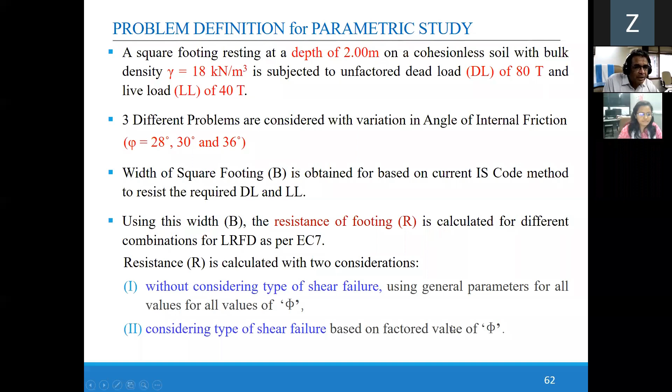For 30 degrees, I will not be considering the type of failure; it will be considered as general shear failure. That is case 1. Case 2 means 36 degrees in the IS code is a general shear failure, but if it is a reduced value in the Euro code, it should go to a mixed shear or local shear. So the type of shear failure also has to be considered.

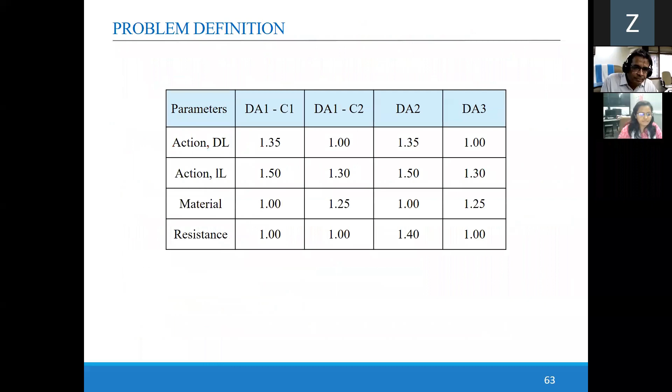These are all the load combinations to be taken into account: 1.35, 1.5, 1, 1.3, and this table is prepared. So have a look at the table.

Okay, so it will be 28 degrees, and it will be a local shear failure. When 28 degrees is treated as general shear failure, the resistance becomes very large because 28 degrees is treated as general shear failure. And when 28 degrees, whatever the type of failure is, is accommodated as local shear failure...

So the factor becomes R upon Q. Okay, so the resistance is much higher. The resistance calculated is much higher than the IS code.

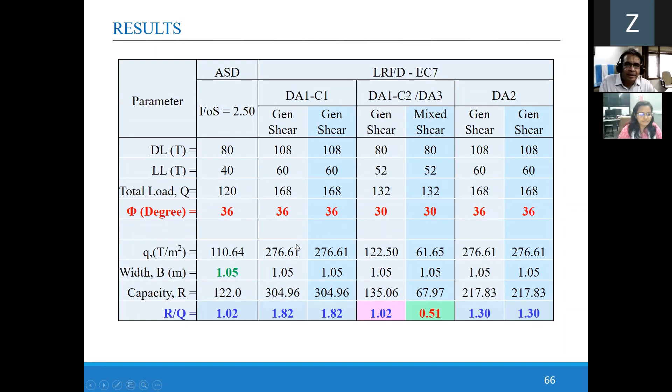So if I am implementing the mode of shear failure to be accounted for on the factored phi value, if mode of shear is accounted for in the factored phi value, then 36 and higher values are becoming much lesser. So this is the major anomaly in the Euro code 7. So you can visualize with this.

Okay, so 28 degree and less, accounting for the type of shear failure, which will be on the higher side, and 36 degree and more, here accounting for the type of shear failure, it will be on the lower side. So that is the anomaly, and that has to be overcome.

We are working on to that instead of applying the partial safety factor to the phi value, we should apply the partial safety factor to the parameters which are based on the phi value. So instead of applying partial safety factor to phi, we should apply partial safety factor to NC, NQ, and N gamma. That will relieve all the problems.

Okay, so from the given phi value, you first find out NC, NQ, and N gamma based on the type of value, and whatever partial safety factor is to be applied, it should be applied for NC, NQ, and N gamma instead of applying it to the phi values.